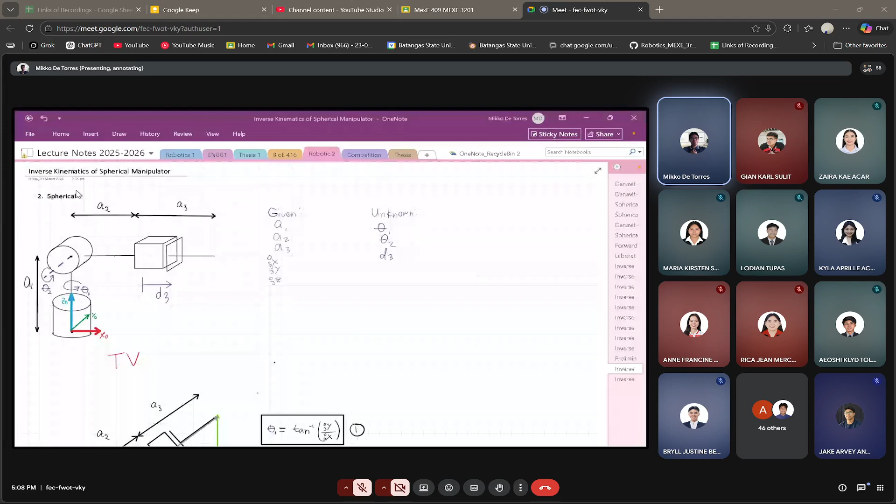Sir, nasa San Nieves na kami ni Ramirez at Francis.

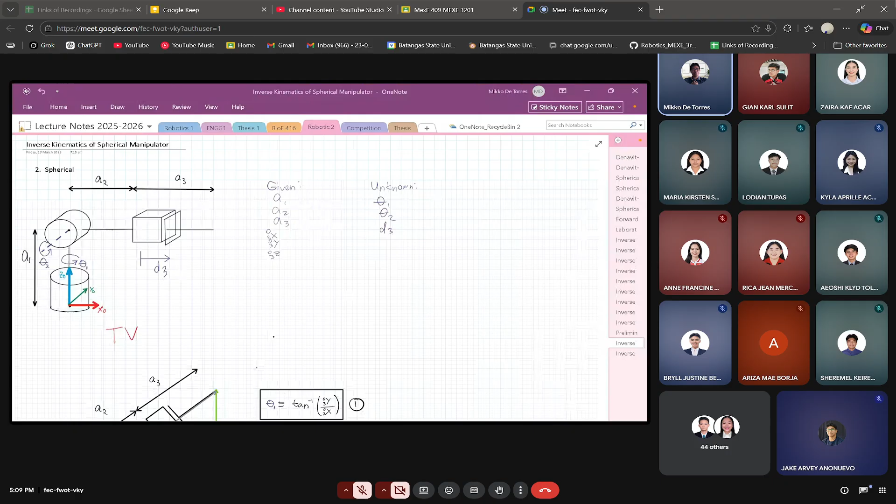Okay, are we done with spherical here? Last week, what was it? Spherical and cylindrical. We are done with spherical and cylindrical.

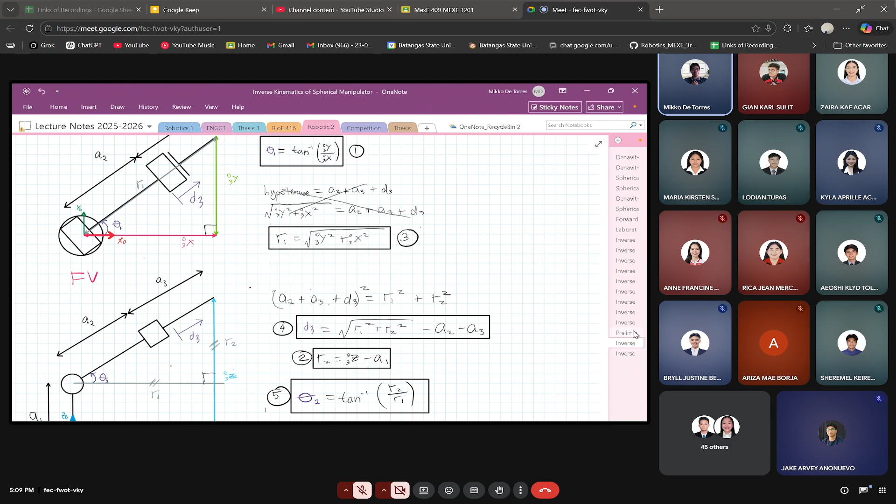Class, cylindrical. Class, are we done with cylindrical and spherical? Yes, I think so, sir.

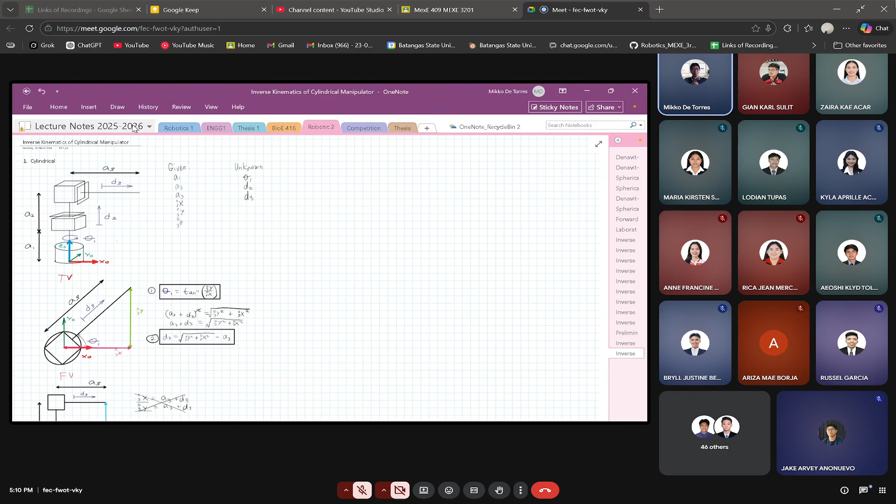So this is the last mechanical manipulator we'll cover. And so we are now at inverse kinematics of SCARA manipulator. Inverse kinematics of SCARA manipulator.

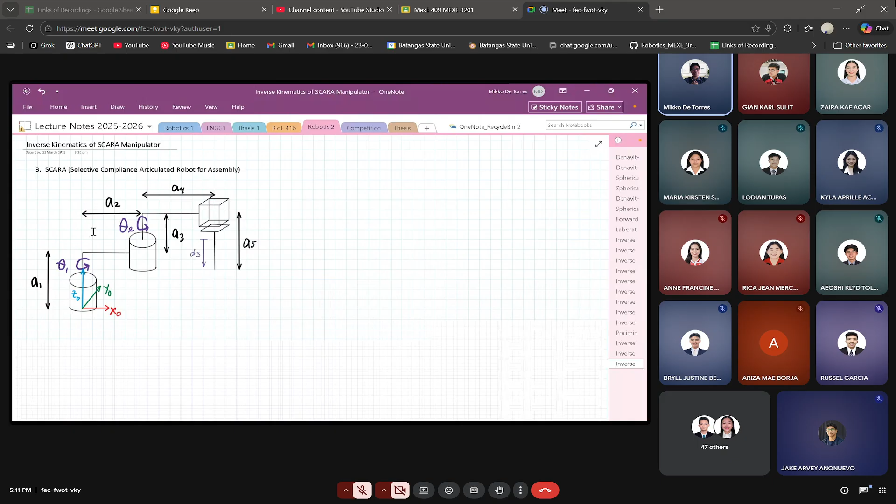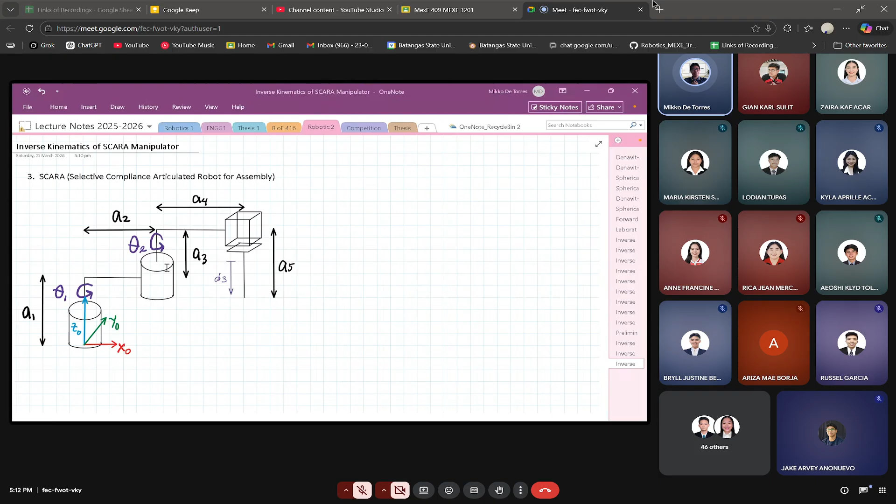Yes, this is our standard SCARA: Selective Compliance Articulated Robot for Assembly, mechanical manipulator. We already discussed about elbow up and elbow down.

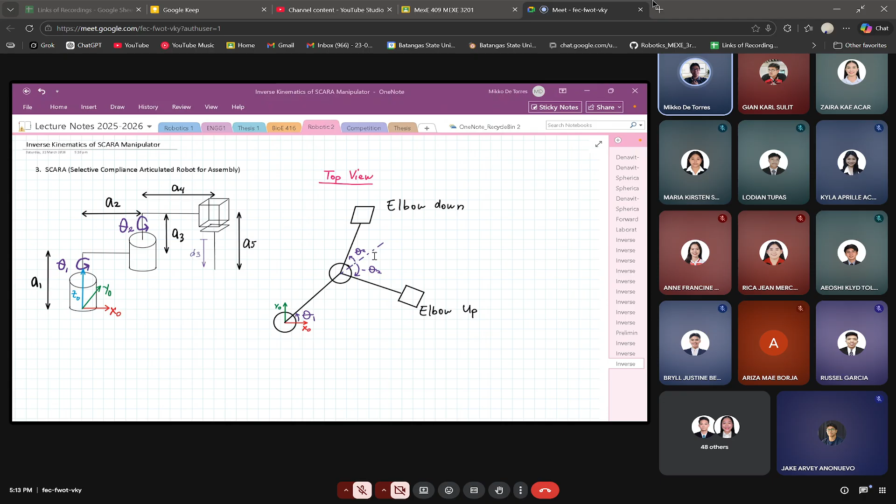So in articulated manipulator, we discussed that we derived the solution using the elbow up. For SCARA manipulator, we will use the elbow down, because at top view of SCARA manipulator, it looks like an arm, a top view.

Also class, remember this: the values of elbow up and elbow down are not equal, okay?

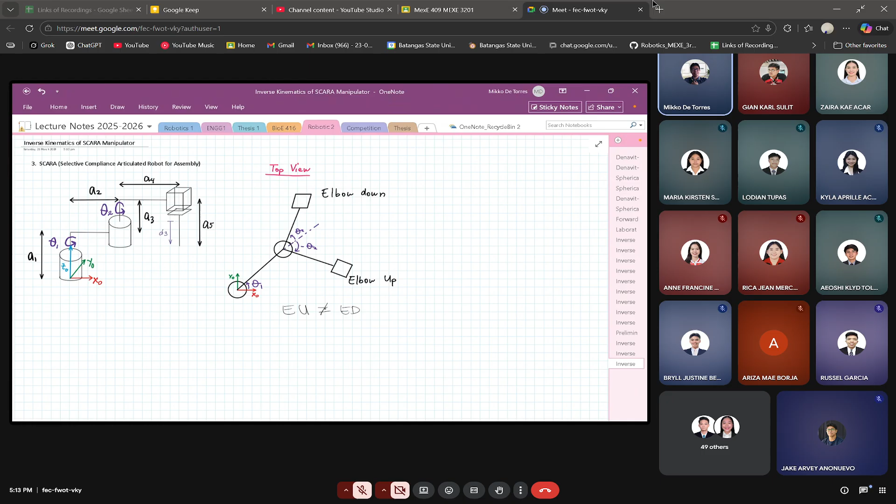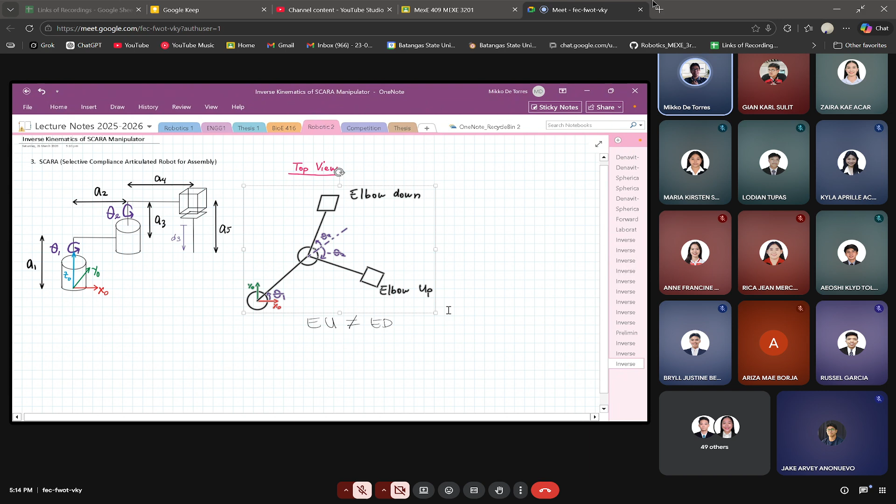So if we use elbow up in our SCARA manipulator, and we also use elbow down to derive the solution of inverse kinematics, the values we get in elbow up are not equal to the values of elbow down. If you get both the elbow up solution and the elbow down solution, the values will not become equal. So we will just choose the elbow down for SCARA manipulator.

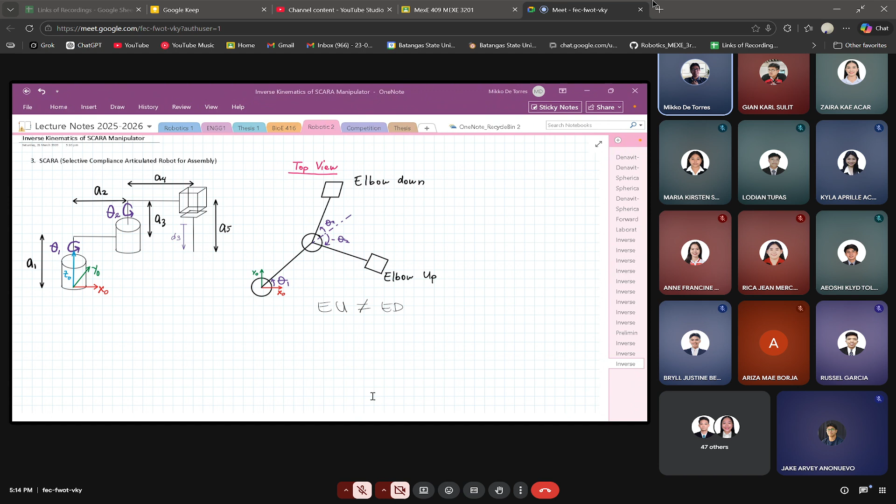We already chose elbow up for the articulated manipulator. So we will use the elbow down configuration in our top view drawing of our SCARA manipulator. We will now draw the top view of our SCARA manipulator.

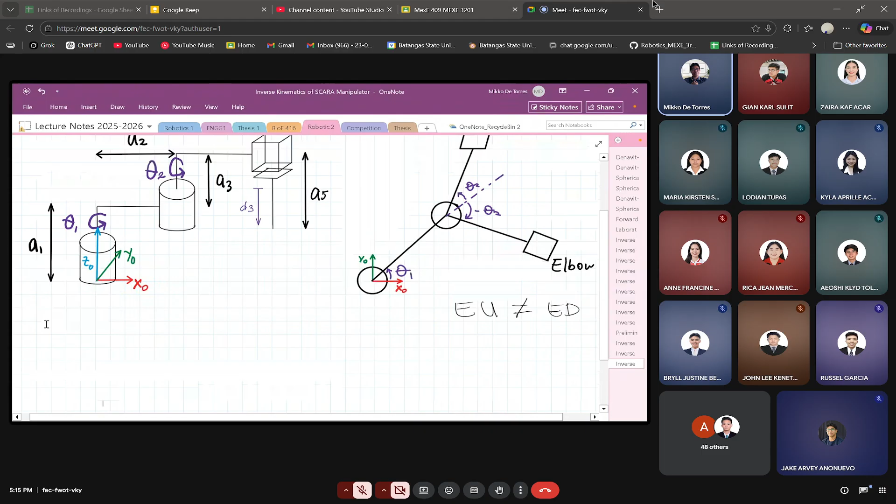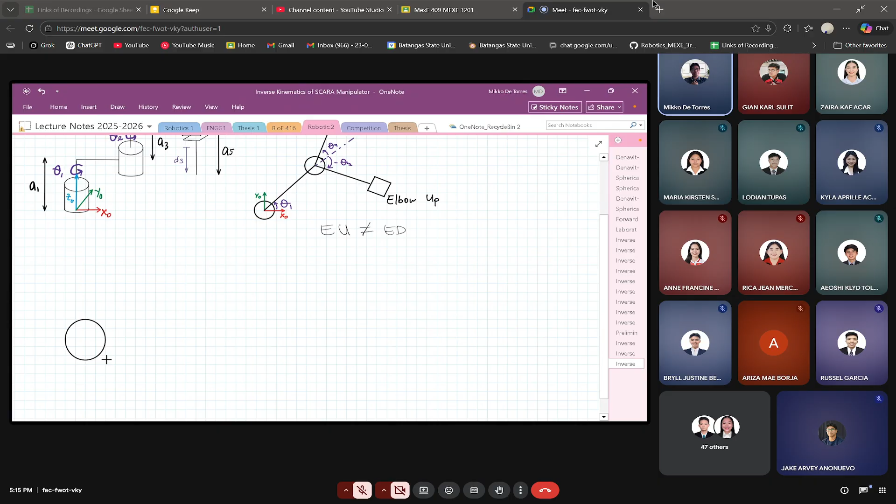So at top view, it will look like this: two circles and one square. Top view.

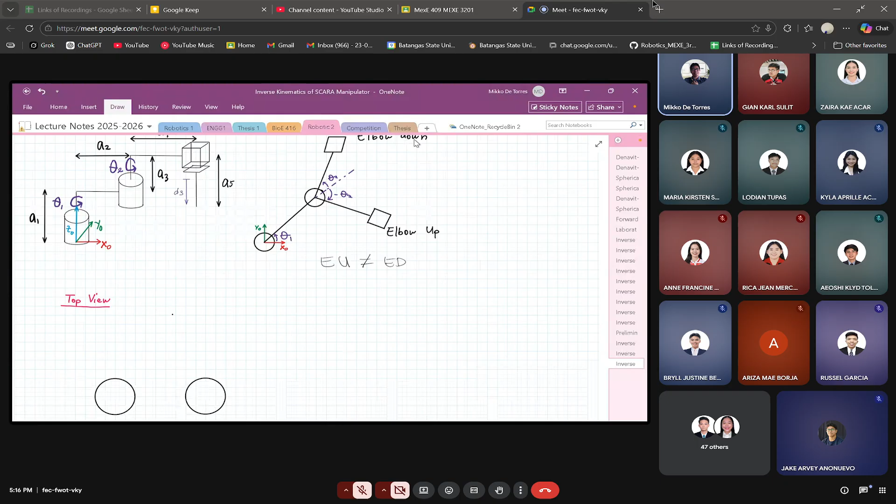So this is the first joint, this is the second joint, and this is the third joint. Under the third joint is the end effector.

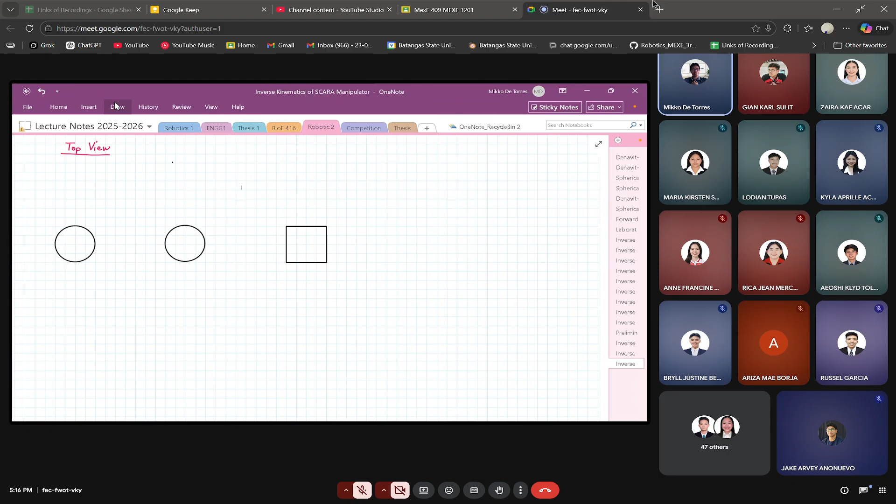Okay, so let's connect them to each other. So this is top view. It will look like this. The first link will look like this, the second link will look like this. So this is top view.

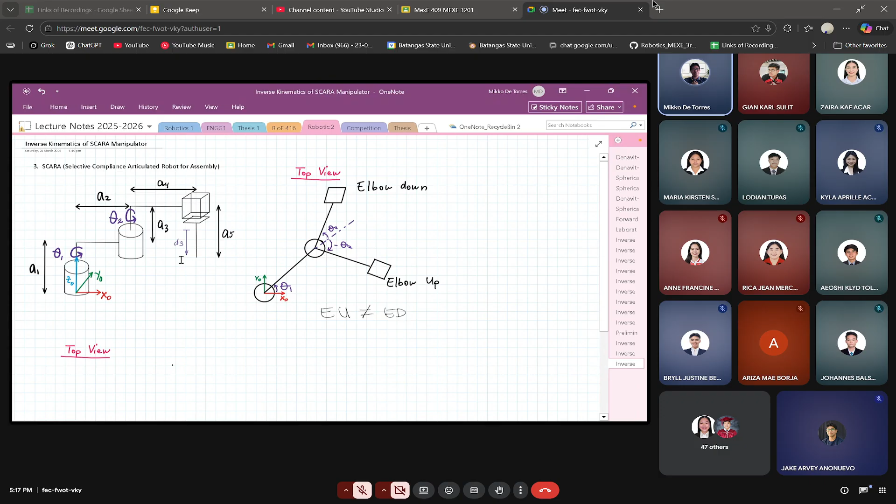We need to solve our joint variables. Those are our unknowns: theta 1, theta 2, and d3. Our known values are a1, a2, a3, a4, a5, and the position vector, which are x03, y03, and z03.

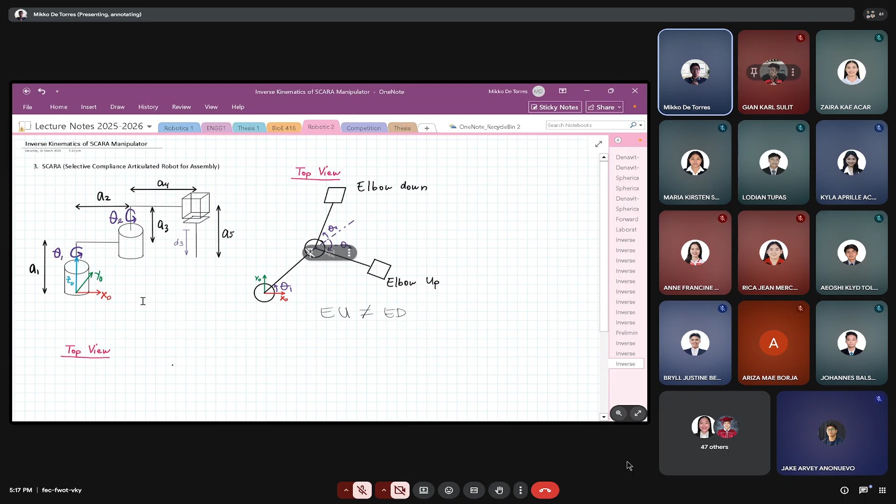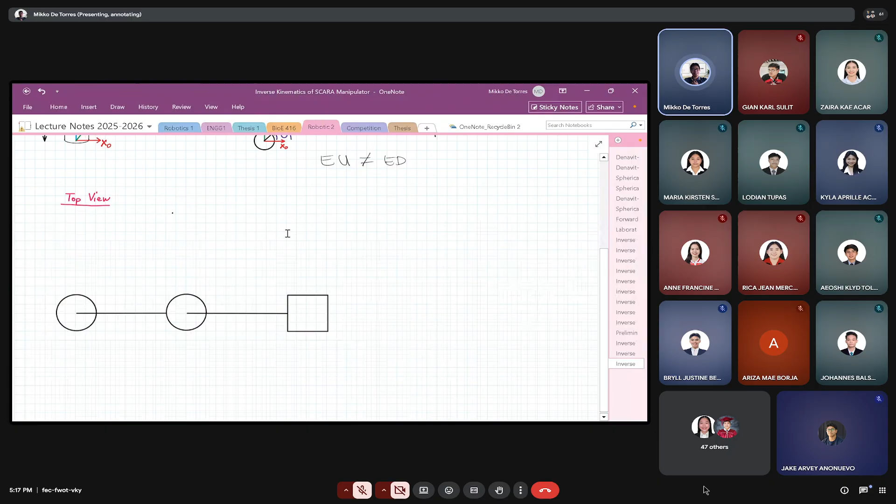So in this figure, we can see that at top view, we can see theta 1 and theta 2. But in this form, theta 1 and theta 2 look like 0 degrees.

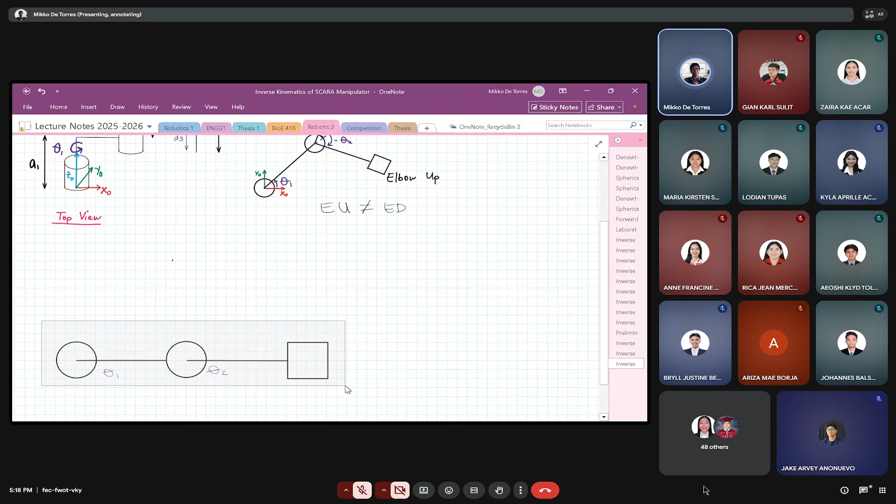So what we will do for our joint 1, we will rotate counterclockwise to make theta 1 not 0 degrees, because if theta 1 is 0 degrees, we cannot derive a solution to get the inverse kinematic solution.

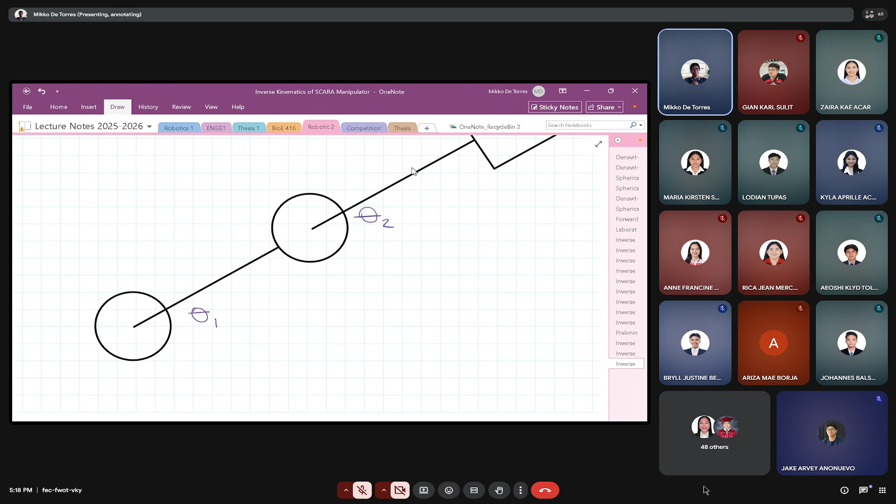So in this form, we can derive theta 1. In this form, we cannot yet solve what theta 2 is. So what we will do is now apply the configuration of elbow up.

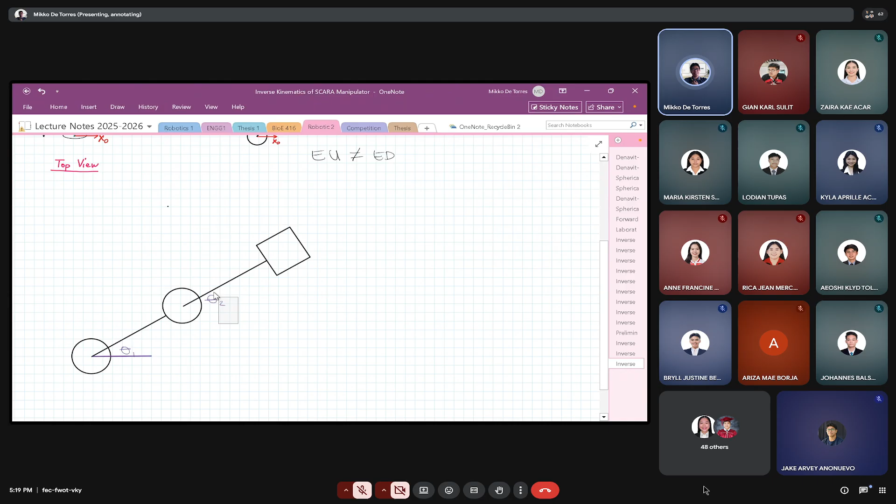So to apply the configuration of elbow up, we will rotate our second link and second joint counterclockwise, like this. Too big. Not like this. Like this only.

Okay, so this is theta 2. Now in this form, we can solve, or we can derive the solution of theta 2.

And based on this drawing, we can see that we can draw two triangles: a triangle for theta 1 and a triangle for theta 2. Both are right triangles, right? No, only for theta 1, not theta 2.

Okay, so now we rotated joint 1 and joint 2. Let's list all the known link lengths.

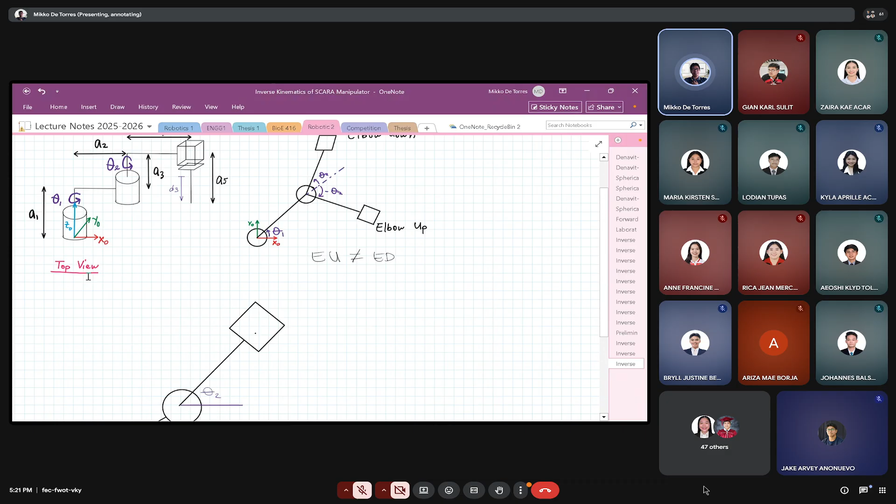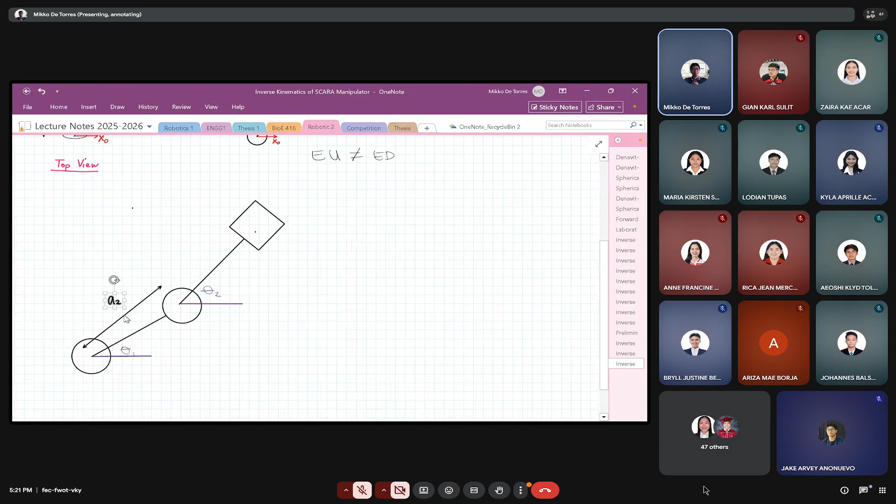So at top view, we can see A2. A2 is a known value. We can also see A4 at top view.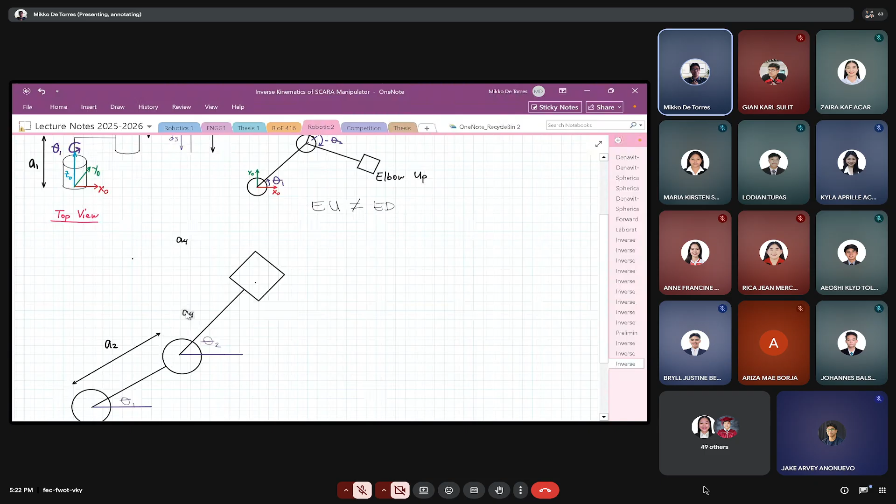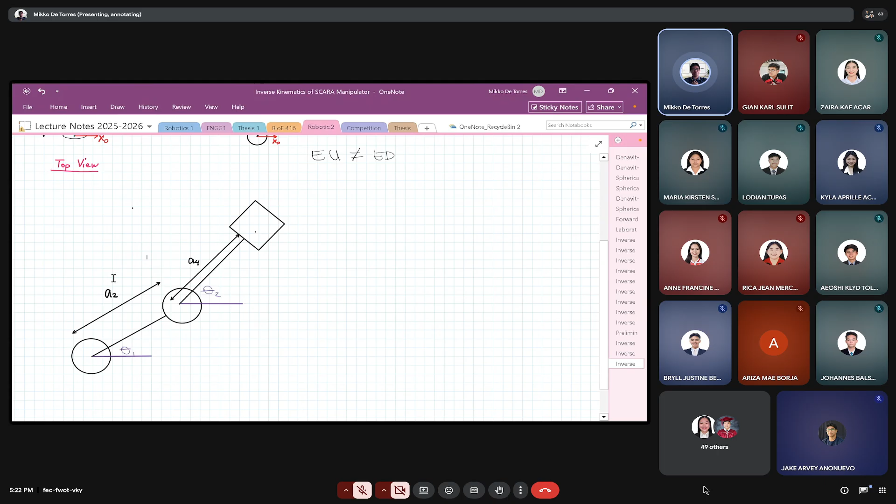Oh, this is not the third link, it is the fourth link. This is the fourth link, and A4. This is A2.

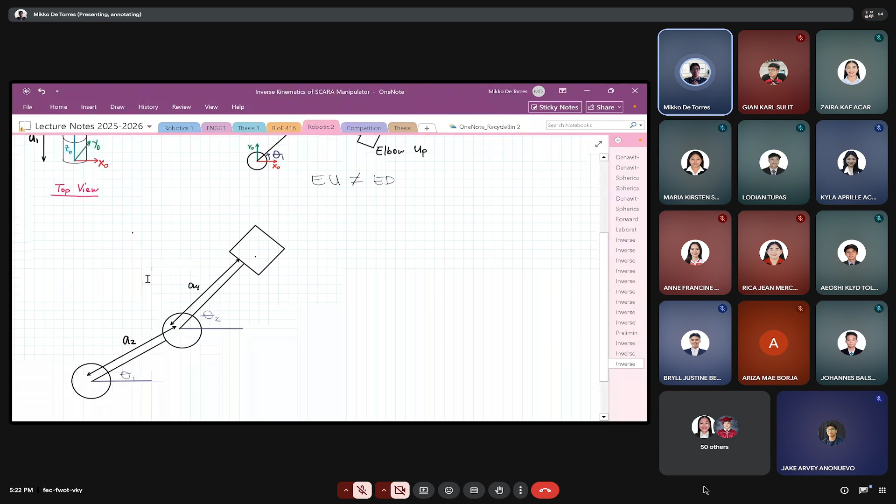At top view, we cannot see A1, A3, and A5. At top view also, we cannot see D3. So we will solve D3 in front view.

So in top view, we can see Y0. Y0 is colored green. This is Y0. At top view, we can also see X0.

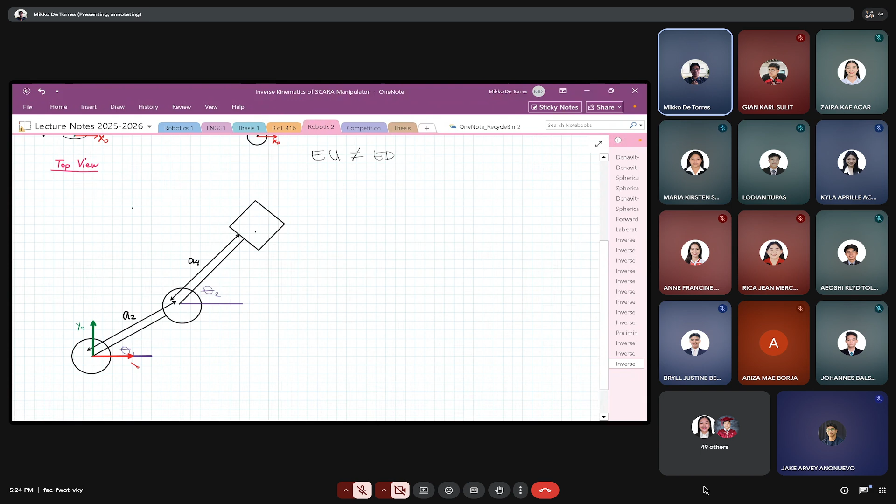Okay, so this is x0. Then, where is our end effector? So the end effector is here. And this end effector is underneath it.

Okay, so we will now trace where is y03 and x03. So along y0, from end effector to the base, from end effector to the base, this is y03.

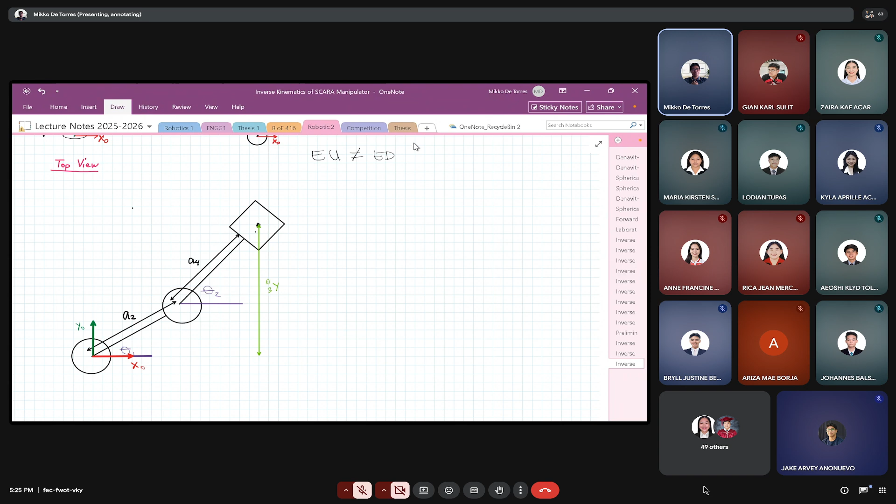Then, from end effector to the base along x0, this is x03. Okay, so as you can see, we now have a right angle. Y03 is a known value, x03 is a known value.

Right angle. Okay, so we have now the opposite line, the adjacent line. Theta 1 is the opposite angle. Okay, now we need the hypotenuse, so we will draw the hypotenuse.

Let's make it color gray. So this gray line is the hypotenuse. So now we have a right triangle.

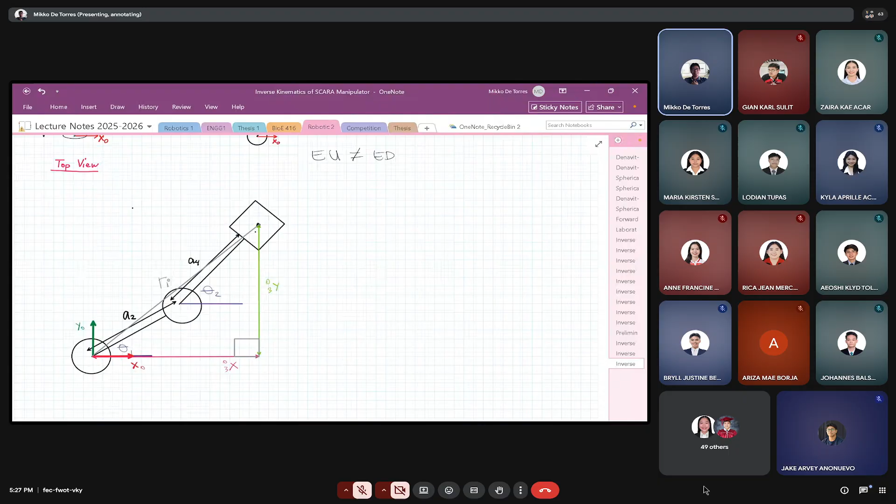We will name our hypotenuse R1. So where is that? Our hypotenuse is R1. Then let's move this here.

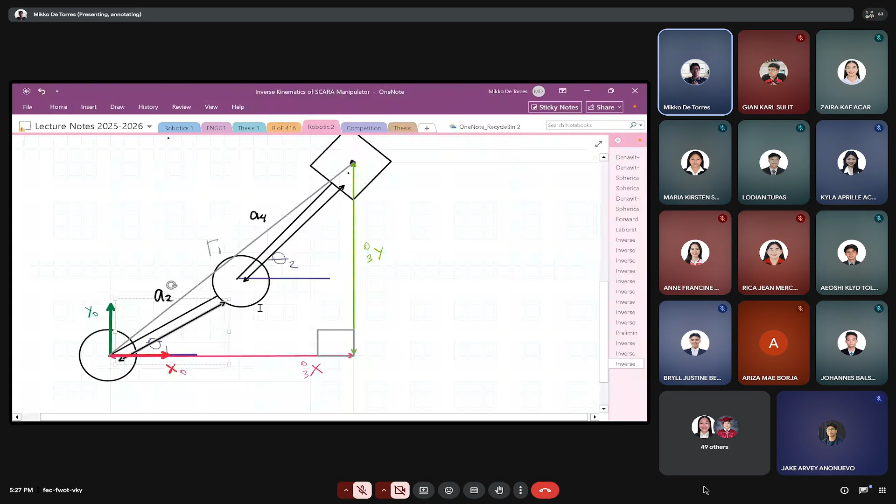This is A2, this is A4. This is A2. This is A4, this is A2. Yeah, this is A2. This is A2. This is A4. This is A4.

So, based on our drawing, let's connect this. Connect this. Wait, that's wrong. Let's extend this. Let's complete the triangle.

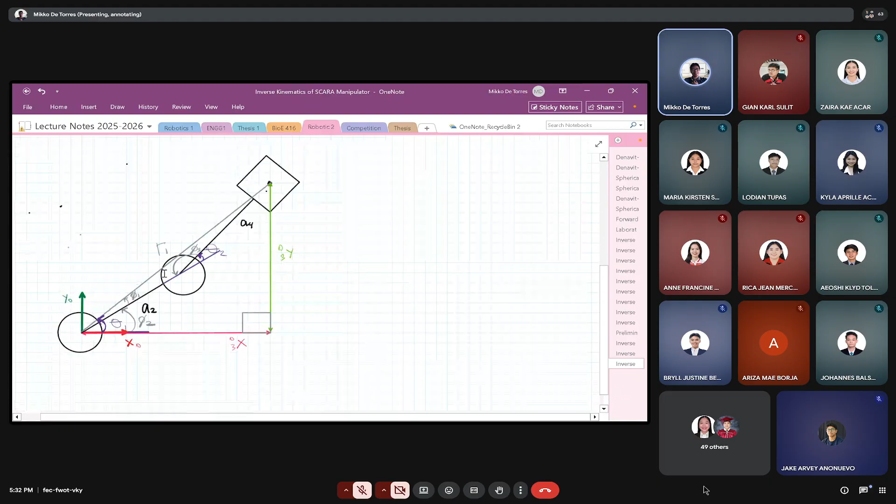Then, additional angle phi3, which is part of 180 degrees with theta 2, positive theta 2. Okay, no more additional variables. So, using this, we can get first what is R1. Is that right? Can we get R1 first?

R1 or C? We can first get what is phi2. We can get first what is phi2. So, phi2 is the opposite angle. Okay, phi2 is the opposite angle. Phi2 equals, because it is the opposite angle.

Am I right or wrong? Is phi2 the opposite angle, or is theta 1 the opposite angle? No, theta 1... oh, sorry. Theta 1 is not the opposite angle. Okay, wait.

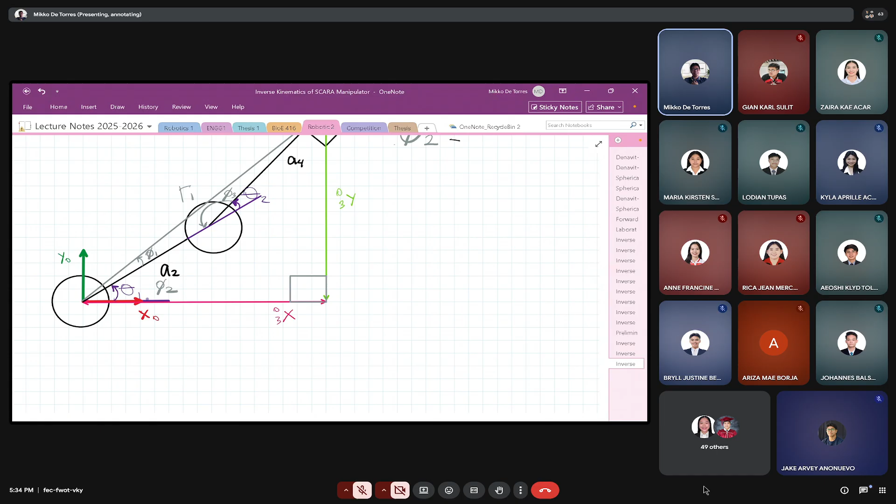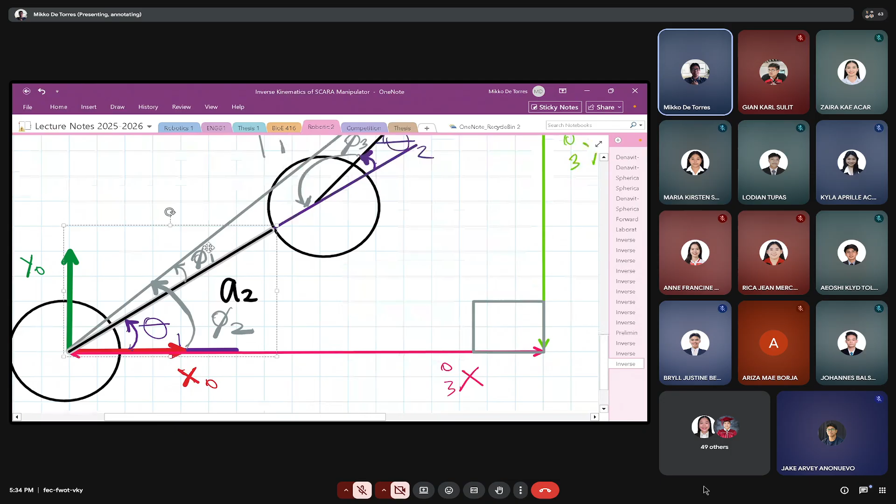Phi2 is... oops. Draw. Okay, phi2 is the opposite angle. Okay, theta 1 is from 0 degrees up to this line, the length A2.

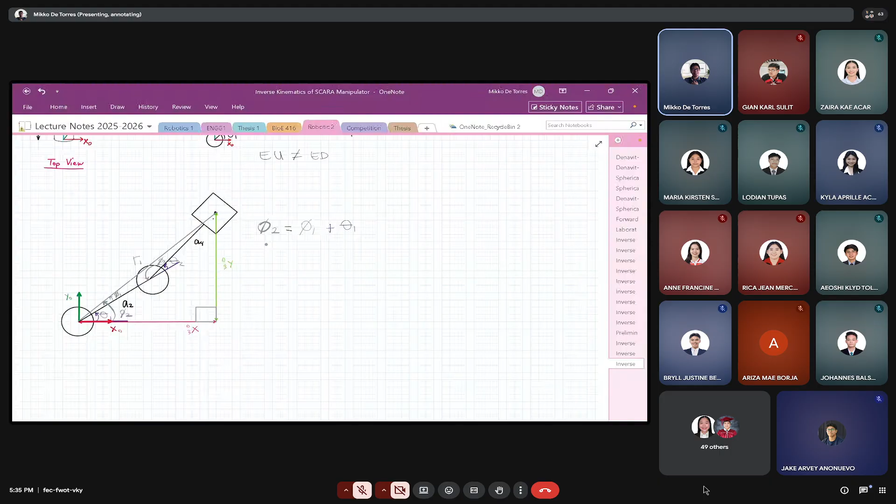So phi2 equals phi1 plus theta 1. So theta 1 equals phi2 minus phi1. Okay?

But we don't know yet what is phi2 and what is phi1. To get phi2, because phi2 is the opposite angle, we can solve it using inverse tangent.

Because y03 is the opposite side and x03 is the adjacent side. So, inverse tangent of y03 over x03. Okay, so y03 and x03 is given, we can solve for phi2. Because we can now solve for phi2, this is our first solution, the first in our program.

Okay, now that we already got phi2, we will now get phi1 to get theta 1. So phi1 is inside the second triangle. The second triangle is not, what do you call it, a right triangle.

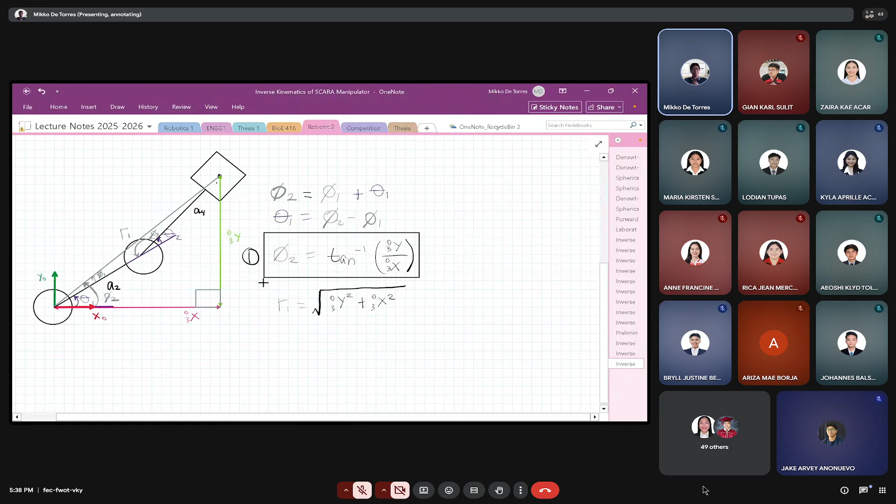Because this is now a solvable solution, we'll put it inside a rectangle, then put a number on it, indicating that this is the second solution to get and the second solution that will be programmed. Now we get R1, we can now get what is Phi 1.

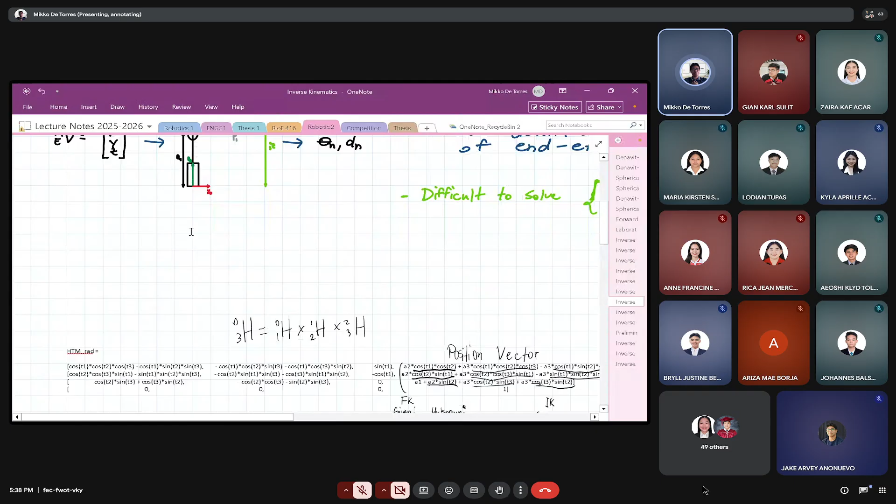Using law of cosine. So what again is law of cosine? The opposite angle equals inverse cosine of the opposite side squared, minus the other two sides, the adjacent squared minus the other side squared, over negative 2 times the other two sides.

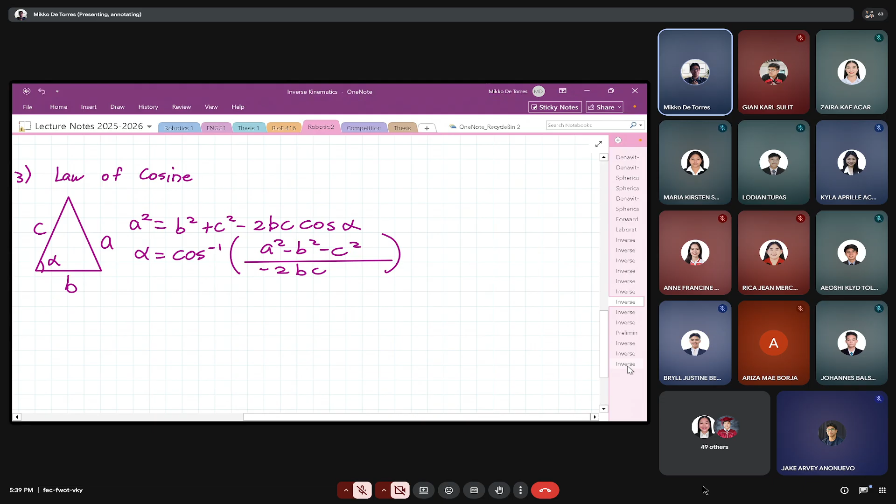Okay, so let's go back to that. The missing angle is phi1 equals inverse cosine

So this is the opposite side. Opposite side of phi1 is a4. Phi1 and a4, so a4 squared, minus the other sides, r1 squared minus a2 squared. So these are all given, over negative 2 r1 a2.

We can now get what is phi1. Because this is now a solvable solution, we can put it inside a rectangle, then put a number on it. This is solution number 3 because phi1 is already solvable, you can now put this in a rectangle.

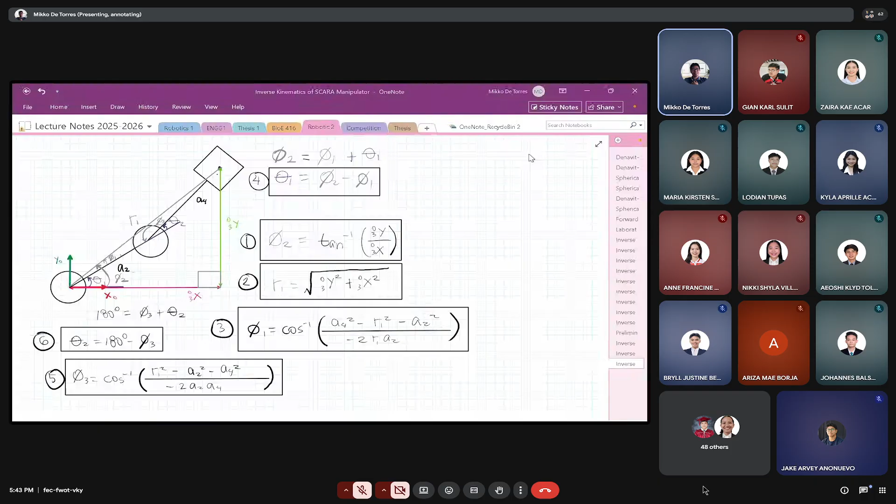So at top view, we can solve theta 1 and theta 2. Let's print screen first class, or check first if our trigonometry is correct.

Number 1 is inverse tangent. Number 2 is Pythagorean theorem. Number 3 is law of cosine. Number 4 is subtraction. Number 5 is law of cosine. Number 6 is subtraction. Let's check first if it's correct.

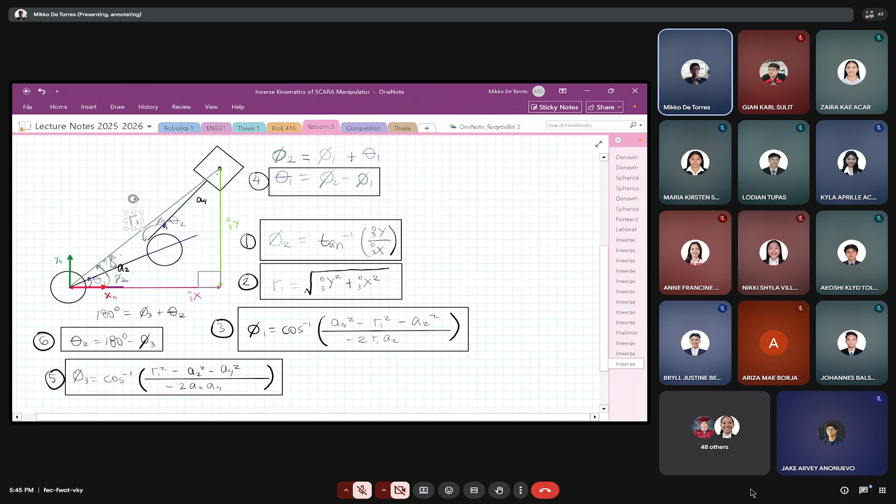Phi 1, phi 2, then theta 2.

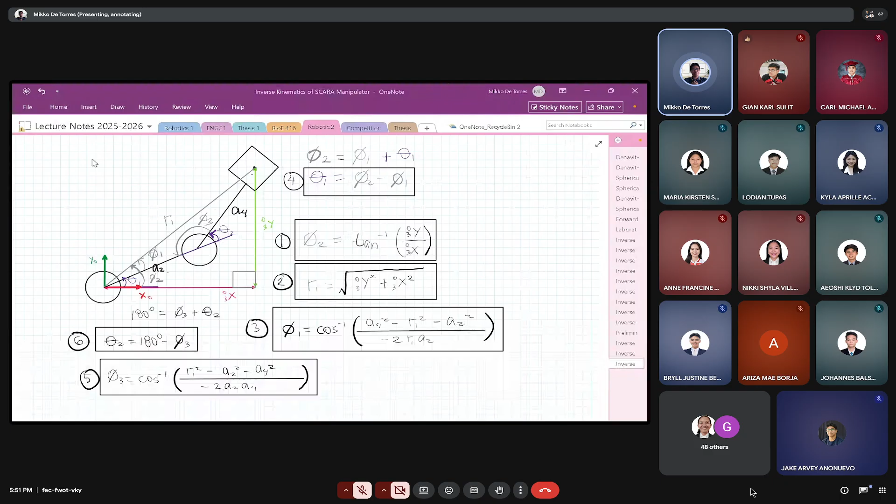Okay, let's proceed to the front view. Let's go to the front view.

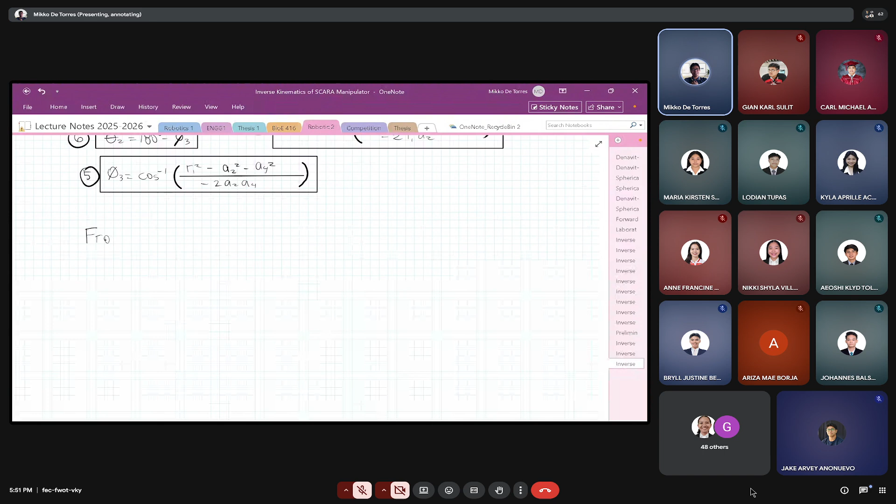At front view, the shape of our SCARA manipulator, so at front view, it looks like a rectangle, a square. A rectangle.

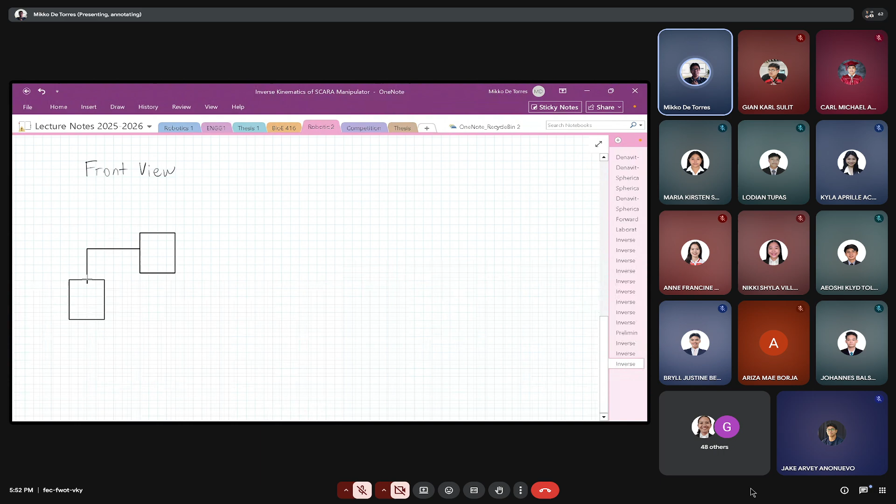This is link 1 and link 2. Then square. Then end effector. It looks like this, at front view.

At front view, so we already got theta 1 and theta 2. We will now get the solution for D3. So here is D3.

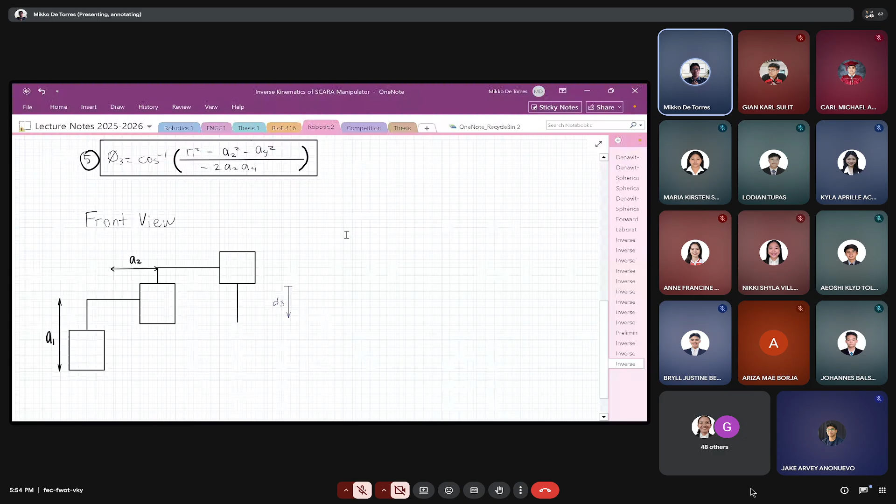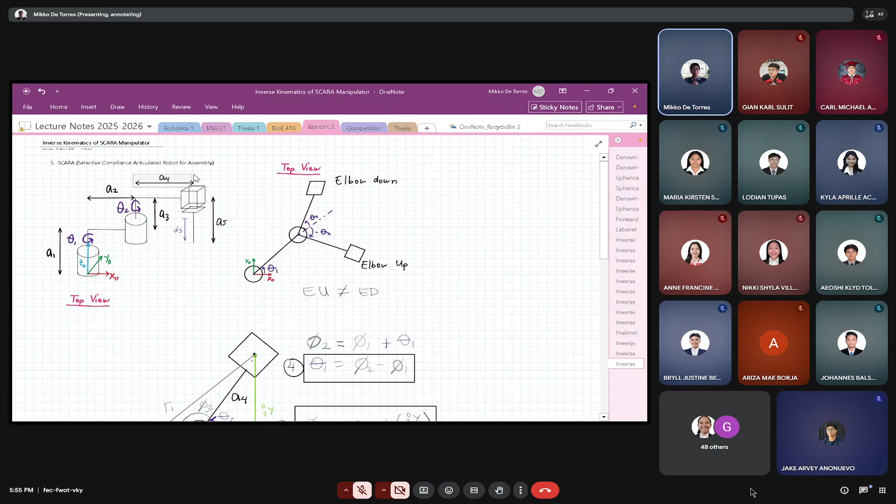At front view we can see A1. We can see A2. We can see A3. We can see all the link lengths. A3. We can see A4, up to here is A4.

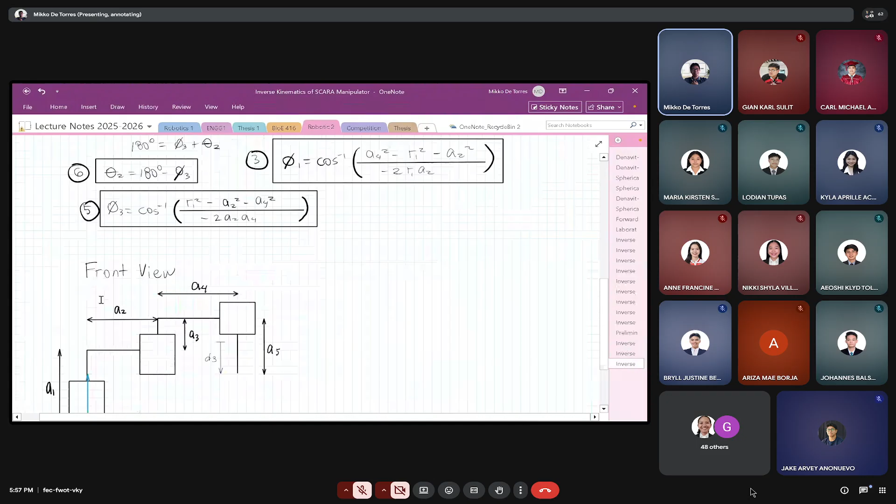We can see Z0. What else do we see? Nothing else. Then we will now trace Z03 and X03.

So Z03, along Z0 from end effector to base, this is Z03. Along X0 from end effector to base, this is X03.

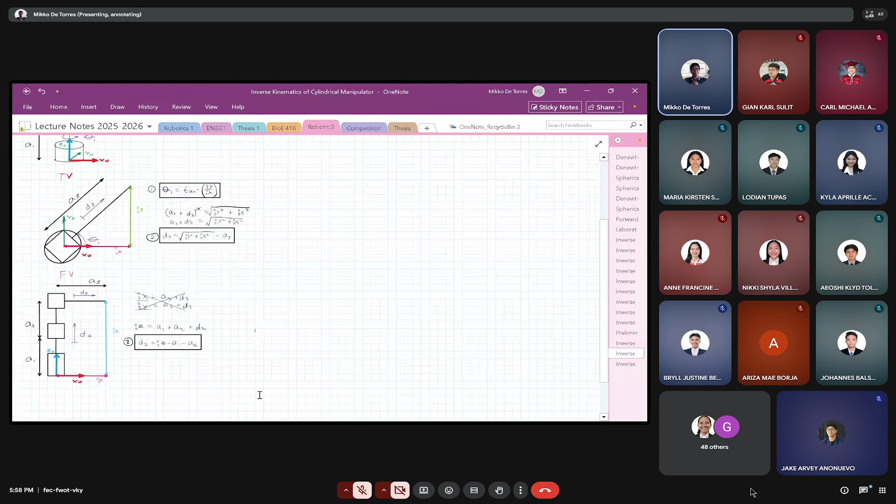So if we go back to cylindrical, it looks like this. Z03 is along A1 and another vertical length, so Z03 along Z0 is parallel with A1. It is also parallel with A3. It is along A5.

So we don't need the trigonometric functions, the cosine law, Pythagorean theorem, and SOHCAHTOA. We can now solve what is Z03.

We can now get D3. D3 is along Z03 and along A5. So if we solve this in terms of Z03, or before solving along Z03, along Z03 is D3 and A5.

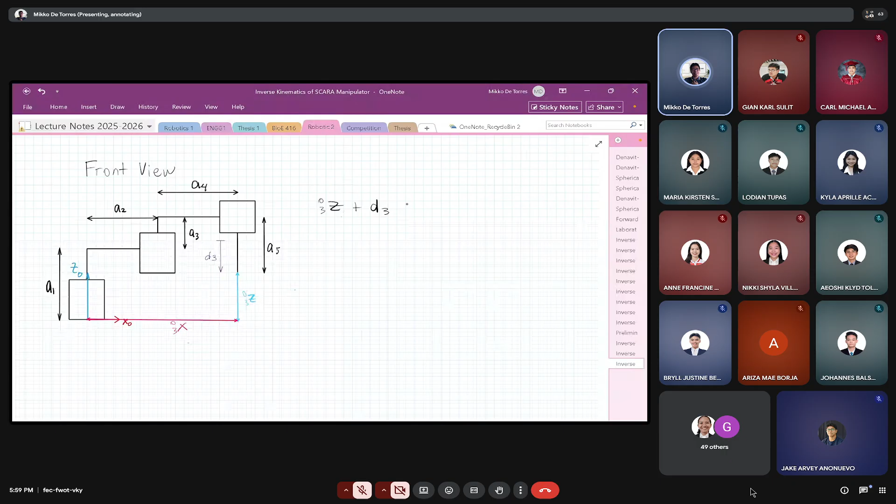Then parallel to Z03 plus D3 plus A5 is A1 and A3. Okay? So if we solve this in terms of D3, our joint variable.

So D3 is equals to A1 plus A3 minus A5 minus Z03. So in terms of D3, you can solve it by putting Z03 and A5 at the other side, at the right side, making them negative.

So we can put this already in our rectangle, because D3 here is already solvable. A1 is given, A3 is given, A5 is given, Z03 is given. So this is our seventh solution: D3 is equals to A1 plus A3 minus A5 minus Z03.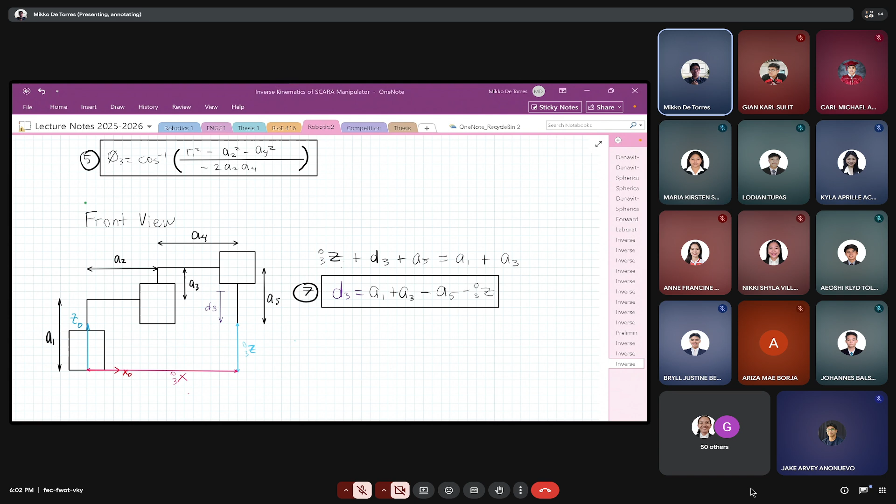If you think about it at first look, it should be negative. D3 should be negative because it is pointing downward. But it is not negative because D3 is the extension of our joint here, the joint three.

This joint three, its length is A5. D3 is the extension. If this is a pneumatic cylinder, D3 is the extension, the extended length. So it is A5 plus D3.

So, although in this figure it is going down, it is not negative because you will add it to A5, which is positive. And if you add D3 to A5, it means joint three is getting longer, so you will not subtract D3.

Z03 is not negative here. It will become negative only if it is transposed to the other side, with A1 and A3. So this is the solution of D3.

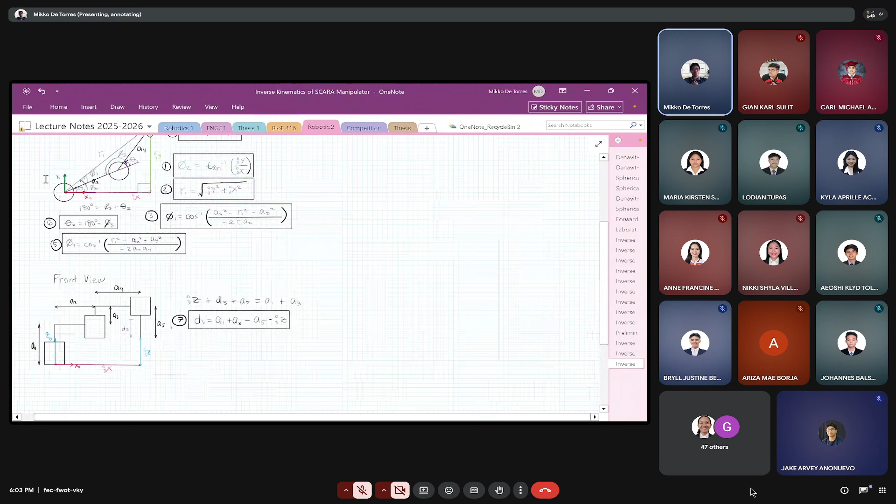So we already completed the 5 mechanical manipulators: the Cartesian, articulated, cylindrical, spherical, and SCARA. These are the 5 standard mechanical manipulators. Up to 5 only for now - we solved the inverse kinematics for these 5.